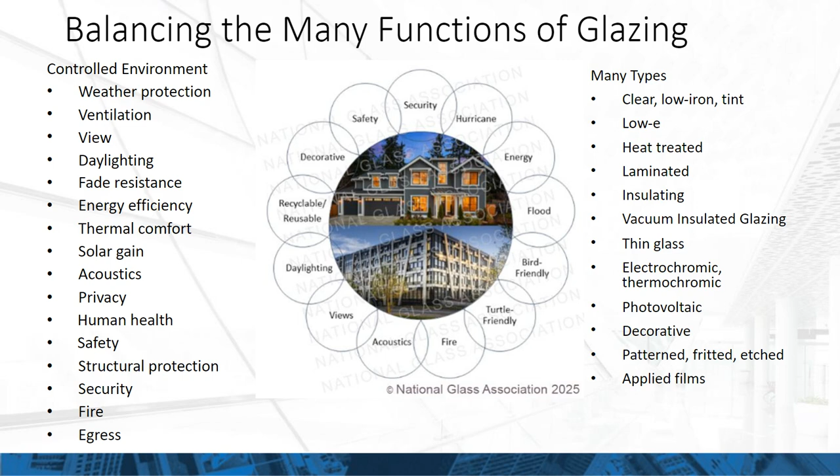For us at NGA, glass is not just for residential and commercial, but glass is being asked to do so much more in our homes and buildings. It's the only building envelope material that is capable of doing so, and so much more. You can see all of the different levels of impacts and applications for glass.

So why are we here today? Within NGA, we believe that for school security, windows and doors respond first. This chart that you're seeing goes from the 1970s all the way up to the 2020s. And as of yesterday, we've had even more. For 2025, there were at least 100 incidents of gunfire on school grounds, resulting in 32 deaths and 98 injuries nationally. So what can we do about this?

Back in Sandy Hook in 2012, similar to Hurricane Andrew in 1992, which was a catalyst for windborne debris codes and hurricane testing, Sandy Hook motivated members in the glass and glazing industry community to act. Companies began looking at school security and security glazing products available and realized that there was nothing designed specifically for schools. Most were intended for banks or embassies. So as such, within the organization, new products were born, as well as new standards.

And since 2014, the National Glass Association released information and bulletins on school security, security glazing for schools. What we have all seen since the Sandy Hook shooting in 2012 is that time is critical. The average length of an active shooter event is 8 minutes. The shortest has been 90 seconds. And the response time for first responders is on average about 3 minutes. Some active shooter events are over before the first responders arrive. And what we would like to say is that your glass and glazing can respond first. It can buy that time.

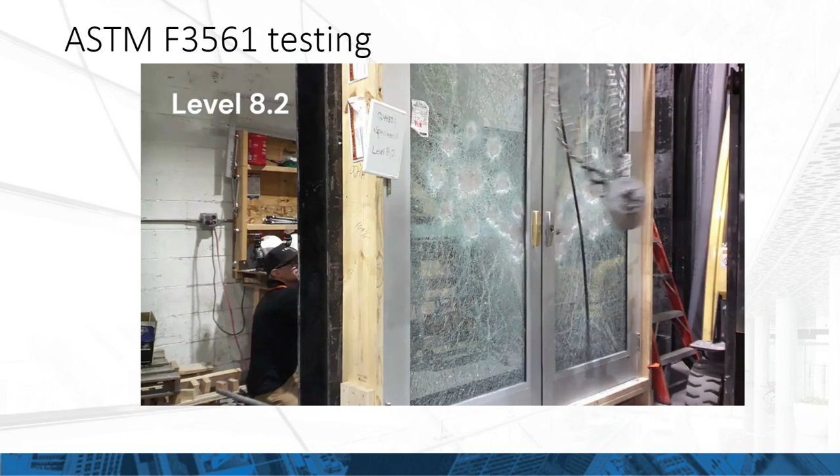And so it is not ballistic resistant. The bullets can go through this according to this standard. However, it does not leave an opening at all. As you can see, the impactor is there after the ballistic portion. And the door should not be open. There should not be an opening where someone can then enter the school.

Window and door solutions. Right now, we would like to say that security glazing resistant to forced entry can be used to slow down an attacker, allowing time for schools to enact emergency plans and for first responders to arrive. It allows school personnel and first responders to see the impending danger. So that's why you have the windows there, so they can see what's happening, alert, and adjust what they need to do to get their emergency plans going.

It also provides privacy and allows diffuse light. Of course, many of you as architects know you want the light in schools, so that the students can have better test grades, show up in school, and be aware of what's going on. And it also selectively blocks attackers' line of sight when translucent or reflective glass is used.

It can be designed for forced entry resistance and/or bullet resistance, and there are options for retrofit as well. We like to create a secure environment for teachers and students without imposing visible barriers, and of course provide passive protection even during power outages.

I'm going to turn this over now to Jamie Gascon, who will tell us a little bit more about Miami-Dade County's approach. Jamie? Thank you, Irmela.

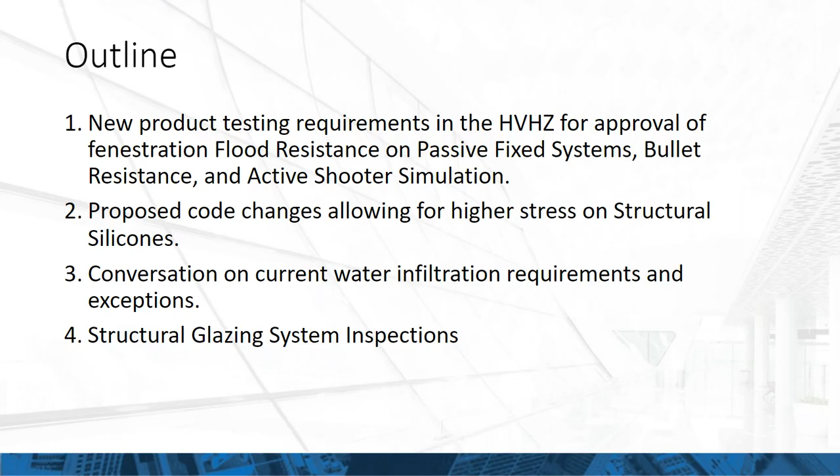Another change that we've made is for checklists on testing for bullet resistance and active shooter simulations. Added to which we then have a specific testing code change for increasing structural silicone capacities, and then as well a code change for the water infiltration on fenestration door systems. And then I'll end the segment with some structural glazing inspection requirements that are unique to our area here in South Florida under the high velocity hurricane zone.

So first off, the testing protocol that's been developed recently. This would be for flood resistance test procedures of passive in-place systems. And this has primarily been developed at the request of industry in collaboration with local testing laboratories for a set of guidelines on how to go about mocking up, selecting, and testing the assemblies that are going to serve as these flood resistant barriers and conditions.

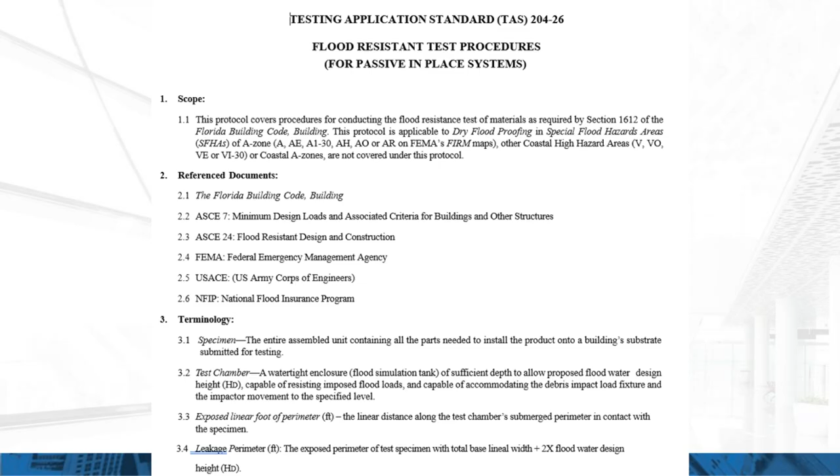The uniqueness of these fixed fenestration units is such that under the FEMA flood protections, there are some dry flood proofing conditions that are allowed by the code. And in lieu of providing alternative after-the-fact barriers, glazing has been more predominantly used in these dry glazed situations. So for that, the Florida Building Code does have a volume of testing protocols that are used in the high velocity hurricane zone, and this was the development of one of those for inclusion.

On the testing requirements, also for bullet resistance glazing systems, we here in Miami-Dade County have developed this new checklist that's going to serve for calling out 2 additional new tests for us here in South Florida, which would be the ASTM F3279 on the standard test methods for ballistic resistance, and the UL 752 test for ballistic resistance. Manufacturers will now have the options to include these as added performance on their product approvals with Miami-Dade County. This does have the requirement that each product type shall meet the requirements per the applicable checklists, if it's a door, if it's a window, and so forth.

Additionally, we also elaborated a forced entry resistance checklist to capture the performance under simulated active shooters, and that's then inclusive of the ASTM F3561 for standard test methods for forced entry resistance, similar to the video that Irmela showed earlier. And then this too would be as a complement to the type of doors and systems, glazing systems that manufacturers are seeking to qualify.

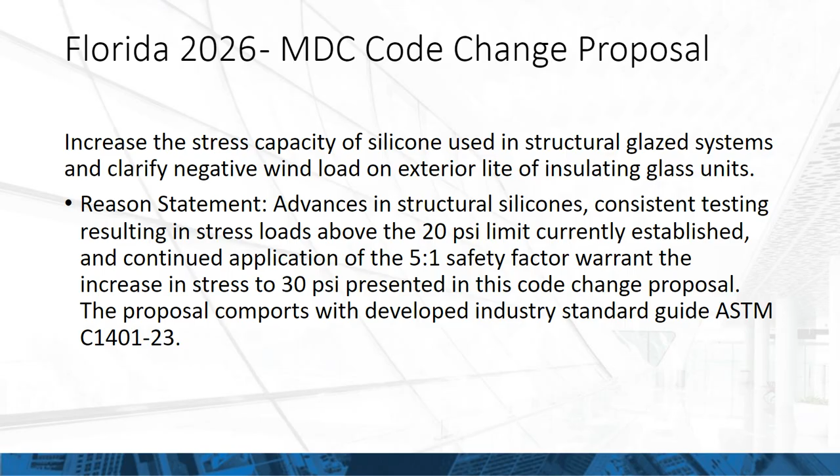From the Florida Building Code's perspective, the added change that was filed in this cycle was to increase the current limitation of the 20 psi stress limits on silicone. Presently, and I want to say that this dates back to the 1988 South Florida Building Code era, this limitation has existed there with the applicable safety factor of 5 to 1. Industry has approached us and consistently shown test evidence that capacities with current silicones far exceed that 20 psi limitation that we had in the code.

So there's been a code change filed to increase that from 20 to 30 psi while maintaining the safety factor of 5 to 1. There's also some minor tweaks here on the thickness and the qualified stress that needed further adjustment due to that, and this code change clarifies that.

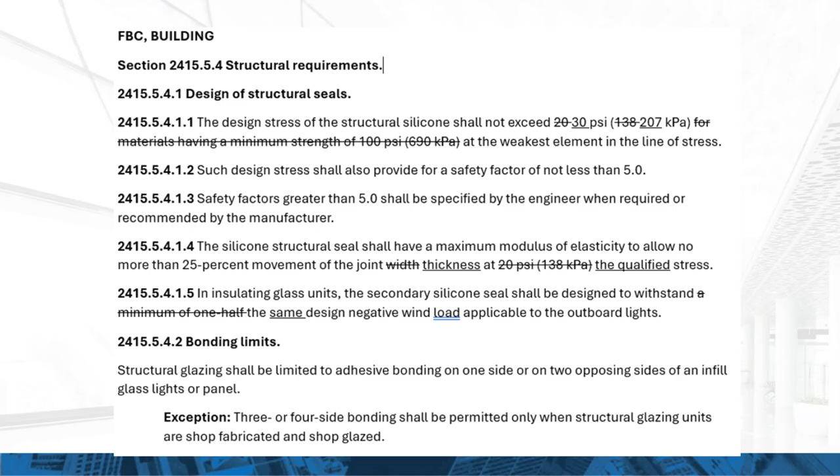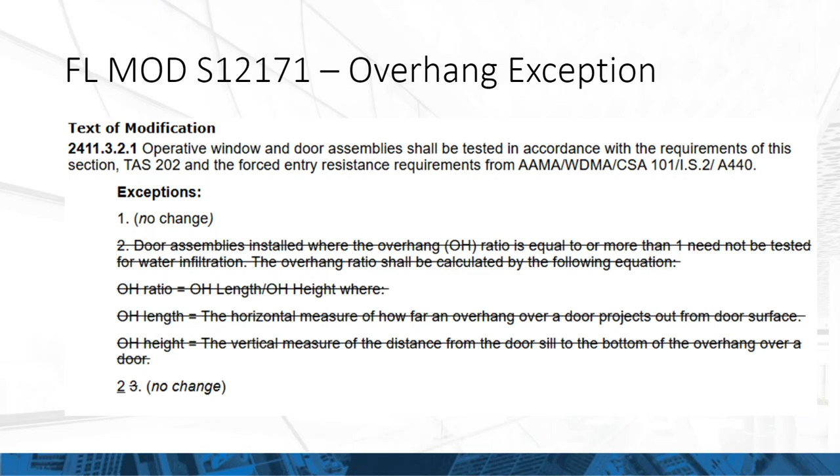On the overhang and water testing of doors, this is a proposed code change that we're dealing with in concert with industry. And essentially the first round was to eliminate the exception that currently exists in the high velocity hurricane zone, that if provided with an overhang, these doors would not need to meet the water performance. In the second phase of the code development, because that code change was disapproved, alternate language was proposed during the allowed period.

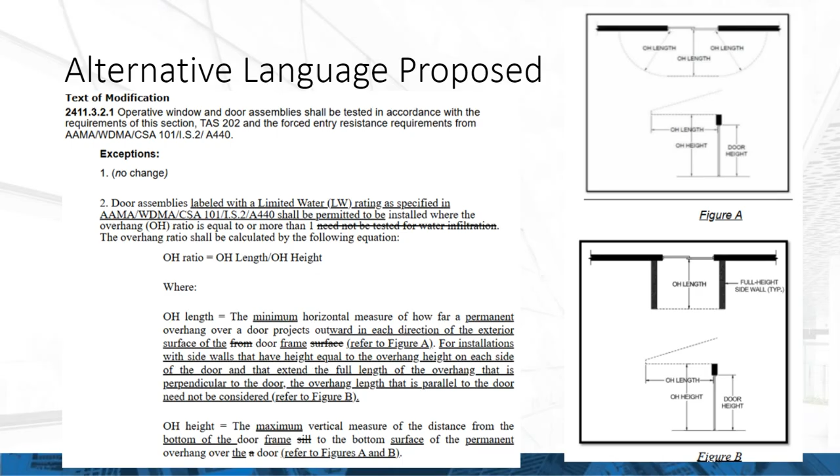And when you have some kind of alcove tunnel condition, that's also part of the considerations as shown there in figure B. This again is currently at the Florida Building Commission, going through the process for approval, potentially for the 9th edition of the Florida Building Code.

And then lastly, I wanted to touch upon Miami-Dade County's requirement for recertification of structural glazing. This is something that again existed in our building codes for a number of years prior to the Florida Building Code taking effect back in 2002, but which has not had the level of enforcement that the code requires.

So in 2022, our Board of Rules and Appeals discussed the matter further, developed a test criteria for effecting these types of tests, and we issued and circulated this advisory memo to all building officials to survey their respective territories and identify buildings that have the structural silicone and applicable to threshold buildings. And from that, a series of guidelines were developed for both the laboratories and the building officials to follow in documenting the performance of those units.

I also want to just point out that our website has been revamped. We do have now siloed the 4 sections of our Board and Code Administration section, where product approval, being one of the more highlighted aspects of our website when it comes to glazing and building envelope products, can continue to be searched by either product approval numbers or manufacturers, even categories of products, to verify their continued acceptance and limits of use.

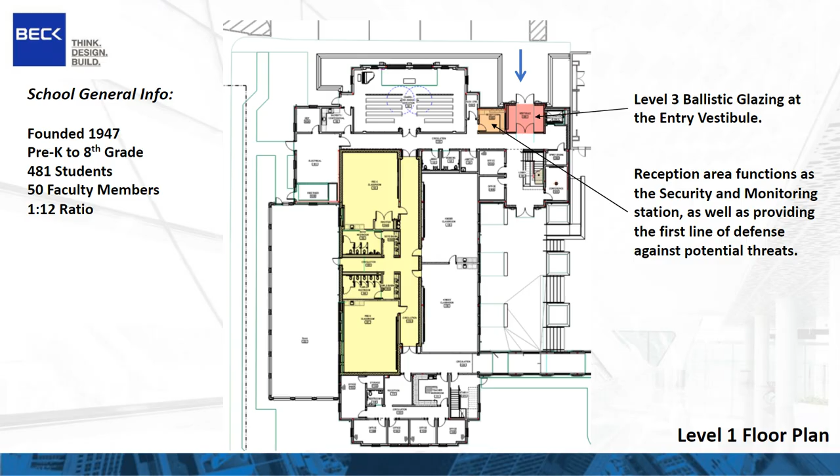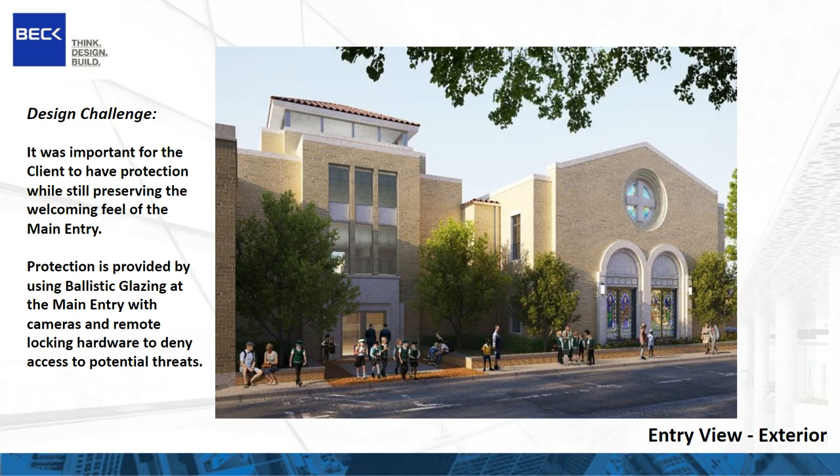And we're using level 3 ballistic glazing in that vestibule. And the reception area is acting more like the security monitoring station and provides the first line of defense against potential threats. So the big design challenge for the client was that it was very important to have the protection while still preserving the welcoming feel of the main entry. Again, they very clearly said they don't want this to look like a bunker. They wanted this to be inviting. The protection is provided by using the ballistic glazing at the main entry with cameras and remote locking hardware to deny access to any potential threats. And we find this to be a good strategy, and ballistic glazing and products like that help us to do this.

On the inside, it was very important to the client. They want to have the security, but they also wanted to feel openness. They didn't want the students to feel like they were coming into the airport security zone or to some high-level security area. And in this case, the vestibule was designed to be basically a man trap because all of the glazing in there is ballistic rated systems, and it's controlled by the reception area, which is the security station. But using these ballistic systems, we're allowed to have the light come through, the views come through, and it feels more transparent and open. And the client was very happy with this solution.

And as I said, this is all part of a process. We're in construction right now. They've got foundations down, and they should be getting steel up pretty soon. But as we moved further through the approval process, the client had second thoughts about the ballistic glazing that we're using at the window that sits between the vestibule and the reception area.

They thought the window looked too visually unwelcoming. It was too heavy, maybe too bank-like. So right now the design team is studying alternative window systems, investigating non-fixed options that would still provide the ballistic protection. This is definitely a process that's ongoing.

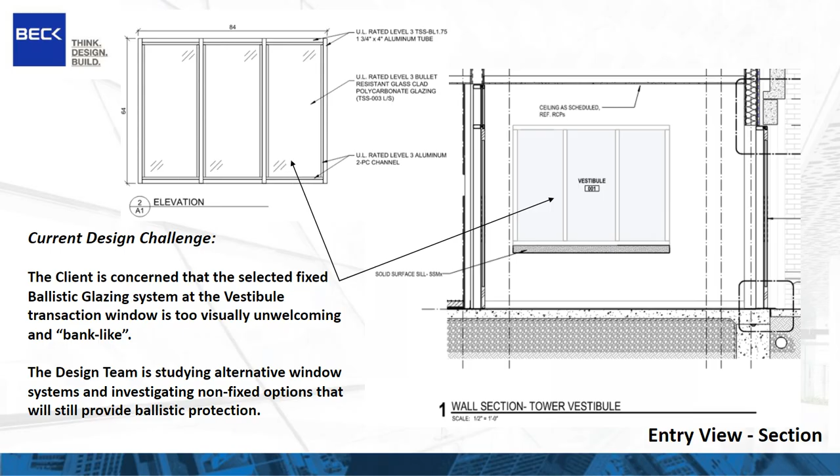The other part of this protection of the students is the storm shelter. North Texas has a lot of high winds and tornadoes and storms like that. And we're required to have protection for education in terms of the storm shelter. A lot of times the storm shelter is either a gym space or a cafeteria space. In this case, the extension, we didn't have any of those large spaces. And the client particularly wanted to incorporate classrooms and the bathrooms that were there and a hallway as part of it.

And again, the other issue was that this building is an addition to an existing church and other education structures, and they wanted to fit in with the window spacing, the aesthetics of the outside. And so we worked with that, and we also had our budgetary constraints to deal with, because originally we had designed all impact rated glazing at the windows to the building.

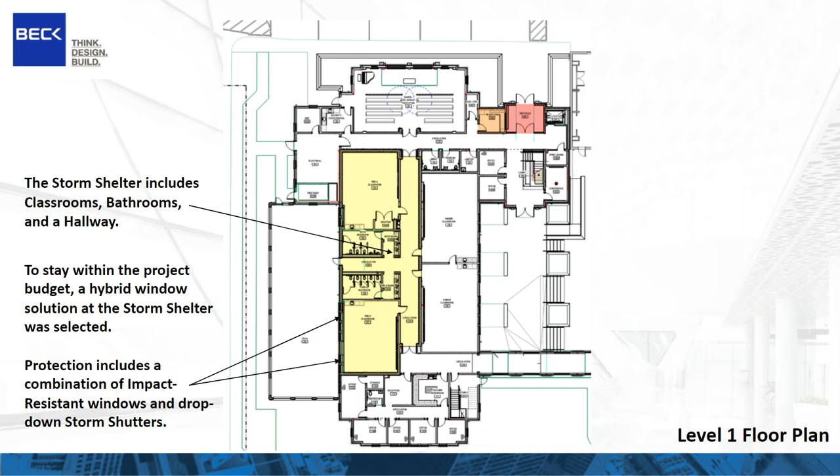Because of the cost, we looked at alternative storm shutters at the windows, which worked pretty well, except in a few areas where because of the wall for the storm shelter, you could not fit in the actual side rails necessary for the shutters. So we actually used a hybrid combination of the shutters and the resistant glass to provide the protection for the shelter.

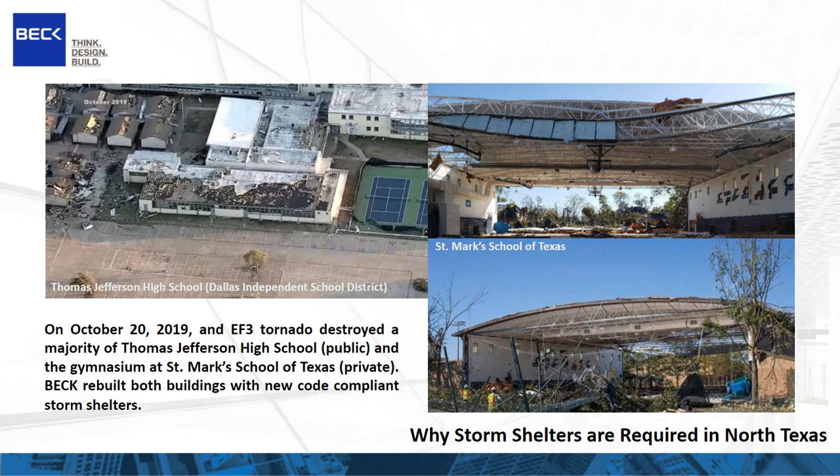And again, the reason we need the shelter in North Texas is because of the storms and the winds that come through. On October 20th, 2019, an EF3 tornado destroyed a majority of Thomas Jefferson High School, a public high school in the Dallas Independent School District. And also the gymnasium and several other buildings were heavily damaged at St. Mark's School of Texas, a private boys' school in the same area. Beck actually rebuilt both of these buildings with new code compliant storm shelters. But you can see the heavy damage that was done to both of these facilities.

As we moved forward in the design process of this project, the client was very interested in trying to maximize the dollars and the spaces. And we talked about an idea of having the storm shelter not only provide shelter from inclement weather, tornadoes and straight line winds, but it could play a role in the defense and protection of the students from forced entry and active shooter situations. So again, the main entry is protected by the glazing and is the first line of defense to deny entry or to trap them if they make entry.

And then the storm shelter is actually part of the lockdown system too. The doors to the storm shelter will close in an active shooter event and lock, and again slow down any intruders. And the walls of the shelter itself, which are reinforced CMU, will help protect that area, in addition to the doors and the other barriers that are already in place. So this was kind of a hybrid combined solution that the owner was very happy with, and we worked through with them to make all these aspects work.

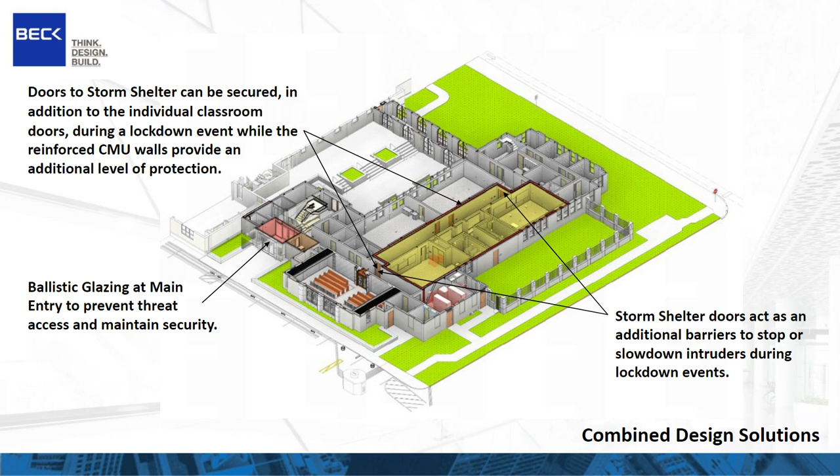That's kind of my case study. Ron Madley is going to take it from here. Ron? Great. Thank you, David. I appreciate that.

And great segue into what I want to talk about, which is integrating high-performance glass into safer school designs. But before we get there, I want to take just a moment to briefly consider the various test standards. You've heard a couple of them already, but I want to talk about a couple of the test standards for forced entry and ballistic resistance, which glass may be subject to.

The first one, and I think most everybody is familiar with this, is UL 752. It's one of the oldest standards out there. It is a ballistic test of a component or a system without any forced entry element to that test. Materials are subjected to live fire testing with specific ammunition for specific firearms, a certain number of shots at a required velocity and distance.

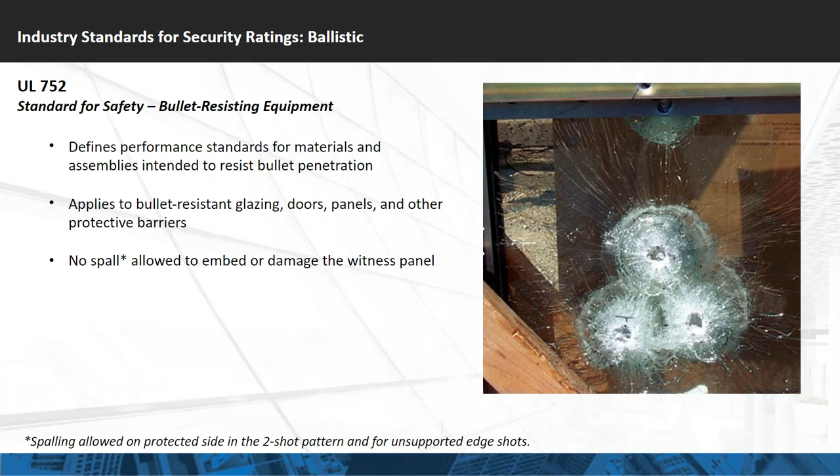The standard evaluates whether projectiles fully penetrate or if it allows any spall or back face fragments to get through. It's important to note that a product must pass all requirements of a given level of the standard to be certified at that specific level. In other words, the levels are not progressive or hierarchical. It was first issued in 1942, and the current 12th edition delivers some significantly enhanced clarity, realism, and rigor in the performance testing.

This page has a lot of text on here, and I'll summarize this by saying the two standards on the left, you see, were published in 2005 and 1998, respectively. ASTM E2395 has no ballistic component to the testing. It is purely a forced entry test, starting with a series of hand manipulation tests of the glazing. There's a lock manipulation followed by an impactor test and a missile impact test, as well as some force pulls that are done on the samples, then a final manipulation test again. Again, no ballistic weakening in that.

Similarly, ASTM F1915 has no ballistic component to the testing. It's purely a forced entry and a pretty aggressive forced entry test at that. It requires consistent duplication of testing using a standardized test fixture, using a large blunt and a sharp impactor over a number of impacts over a period of time. These are done at both artificially cold temperatures and artificially warm temperatures. And then there's a small torch and blunt impactor test that's done at ambient temperature to simulate a sustained flame attack. So a little different approach there.

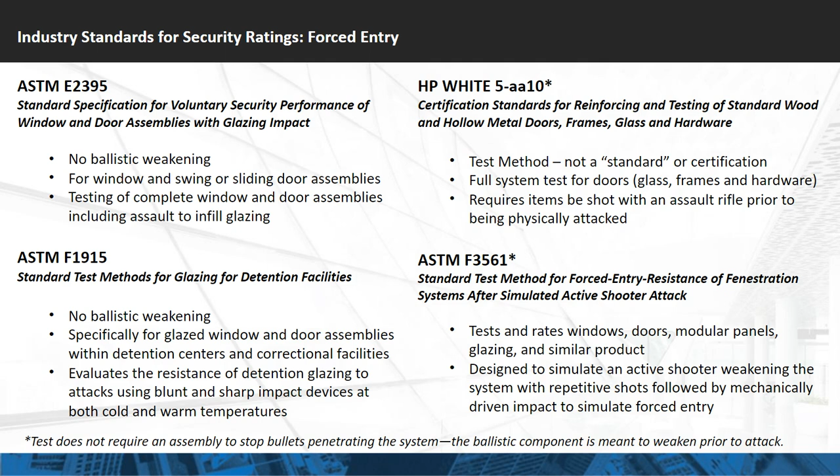The ones on the right are system tests, and we'll focus more on F3561. This is, as Armelin noted earlier, the most recent of these test standards. Published first in 2022, it's undergone a couple of revisions since then. It has a ballistic component. It's designed to use an AR-15 style weapon to ballistically weaken the elements of the system, including the hardware and the glazing, before a prescribed forced entry attack is commenced. It's a pretty rigorous test with 8 different levels of potential protection based on the energy that's put into that sample.

And then finally, ASTM F1233, published first in 1989. This is a very complex ballistic test with forced entry protocols. So it's ballistic and forced entry. It has 12 primary ballistic classes; various results, including fair and unfair shots, penetration or no penetration of the ballistic material through the test subject, and spall or no spall, are all noted. Forced entry is then commenced with a sequence of 41 different test elements, including a flame test, broken down into 5 major classes and subclasses.

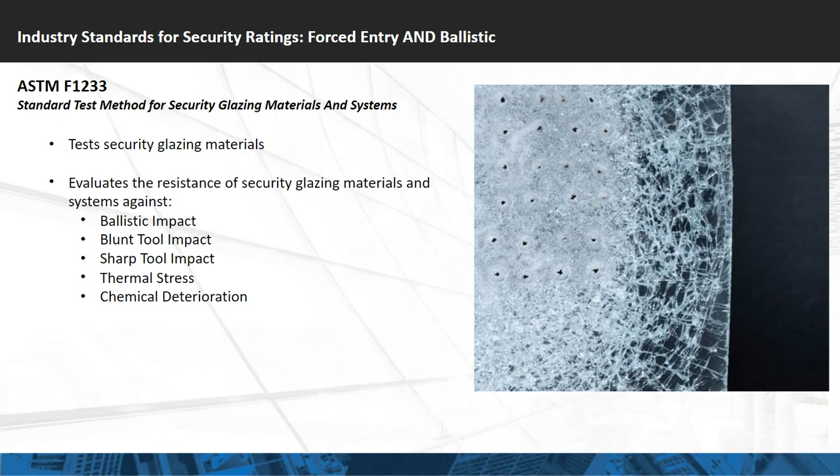The test standard provides some guidance to potential buyers for how you might classify the risk and the threat for both forced entry and the ballistic piece, broken down into 4 major categories: residential, commercial, industrial, and high-risk assets. Notice that there's nothing mentioned about schools in that particular standard. And when we think about schools, we think about places where enhanced security requirements overlap building code requirements. And as Irma touched on before, glazing is often asked to do a lot of things in a building.

And for us, our primary concern here at TGP is about fire. There are 3,200 plus fires annually in educational buildings specifically, and that ties into the second most frequent target site in active shooter incidents. So there's this real intersection of potentially having a threat, whether it's fire or an attack, that could join up in a single system, and you have to provide protection for that.

So depending on the assembly, its context, and stipulations in the building code, it may be required to meet any or all of a number of fire-rated standards first, including UL 9, UL 10B or C, UL 263, UL 1784, and NFPA fire codes, NFPA 80, 252, 257 as an example, or even ASTM E119. It's important to note that all the components, the hardware, the glass, and the frame, must meet the required minimums for specification here. Enhanced security components, like forced entry and BR, must not interfere with the accessibility and egress requirements of that fire-rated system. So if you think about barricade devices, these may not allow free egress or meet standards outlined in the Americans with Disabilities Act.

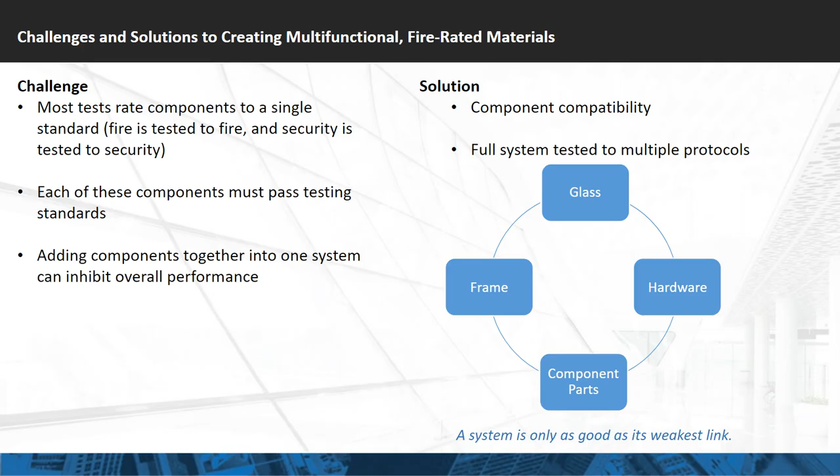to occupant safety. For example, many security-rated components are plastic-based, and they can burn quickly and at great intensity, potentially inhibiting the ability of a fire-rated component to protect occupants. The temperature rise requirements can be exceeded, and maximum temperature parameters of testing standards may not be met, resulting in improper performance of the system. Hardware meant to impede unauthorized ingress must also allow free egress when used as part of a means of egress system.

So looking at these multifunctional fire-rated glazing systems, when seeking solutions, a system approach ensures that solutions live up to its intended requirements. Multifunctional fire-rated systems combine compatible security and fire-rated components, which are tested as full systems to multiple standards. With each component within a single system jointly tested to both fire and security standards, specifiers, buyers, building owners, and occupants can all have confidence knowing that the product will operate according to all the required test protocols.

The security vestibule, similar to what David was speaking to earlier, was one of the several security measures included in the retrofit scope. The interior doors, side lights, and transparent wall panels allow front desk staff to visually assess visitors and to monitor the parking lot and the main corridor. Helping to meet the voluntary safer school design goals, the security ratings for these glazing assemblies provide a barrier against exterior threats, buying occupants time to alert authorities and to take appropriate action.

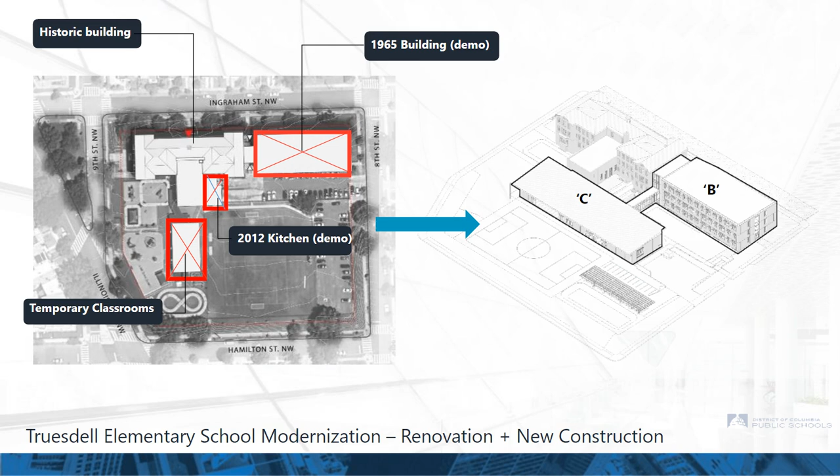A primary design goal of the project was to maximize internal connections and preserve open space on campuses for learning and play. The new academic building aligns with the historic building along the front main street, and the new community building is set back to allow for a protected interior courtyard that serves as an outdoor classroom as well as a playground for the youngest learners and the Child Development Center that will lease the basement floor of building B.

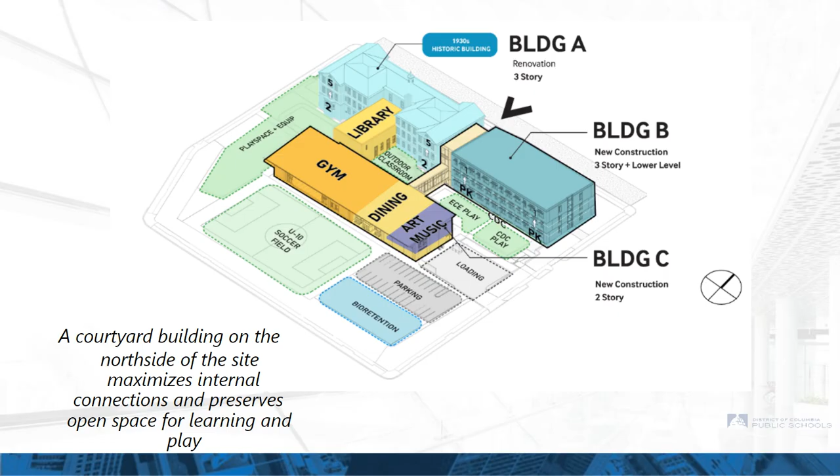These buildings are connected by a bridge that allows for an enhanced visual connectivity in this protected internal courtyard space. This campus also includes a larger play area on the west side, open to the community during the weekends, as well as a soccer field, parking, and a bioretention area that manages all the stormwater for the local DC requirements. So you can see that visual connectivity within secure boundaries is a key design element of this urban school campus.

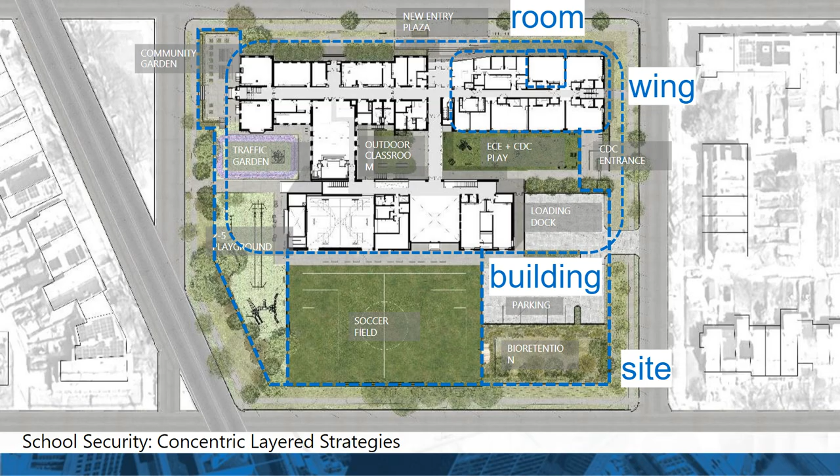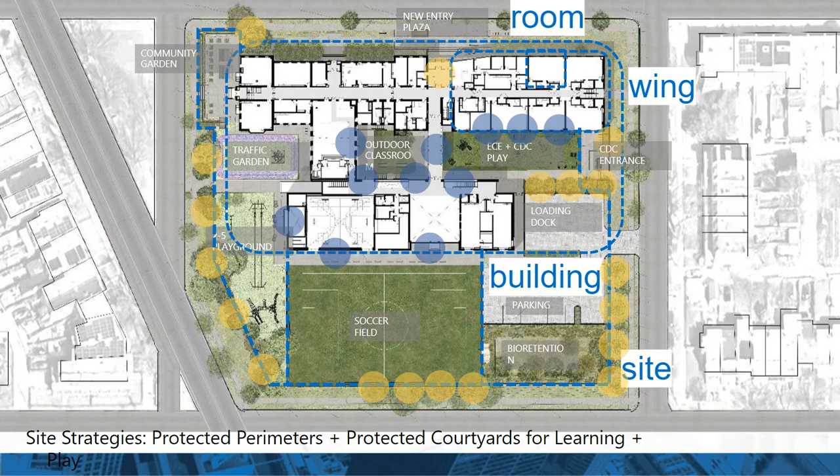When we plan for happy schools, we're thinking about physical security at the site scale, at the building scale, at the learning wing or neighborhood scale, and at the classroom scale. At the site scale, we are using both passive and active strategies to define boundaries like landscaping, sidewalks, and canopies, increasing visual surveillance through strategic glazing and night lighting for eyes on the street and external learning play areas, and protecting outdoor spaces using the building form, landscaping, and perimeter fences, as we can see happening here for the outdoor classroom and play areas in the center of the campus.

We work closely with school districts to understand their pickup drop-off routines and implement secure entries to the site. At Truesdale, the new main entrance has shifted to the connector space in between the academic buildings along the north-south axis of the building, allowing for a more gracious entrance plaza for families to gather in the morning. Along the west side of the property, the west entrance also serves as an arrival entry point, allowing students and families to gather on the playgrounds before the start of school.

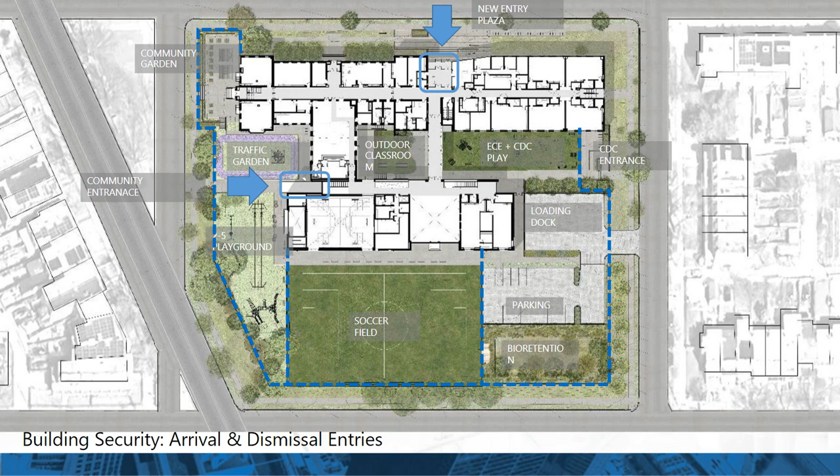This area will also be available to the community on weekends, as well as the community garden in the northwest corner and the soccer fields, but access to the rest of the campus is isolated with perimeter fencing, as you can see with the dashed lines. The front entrance has layers of security, which I'll talk about in more detail in a few minutes. And the west entrance also serves as that community entrance I just spoke about.

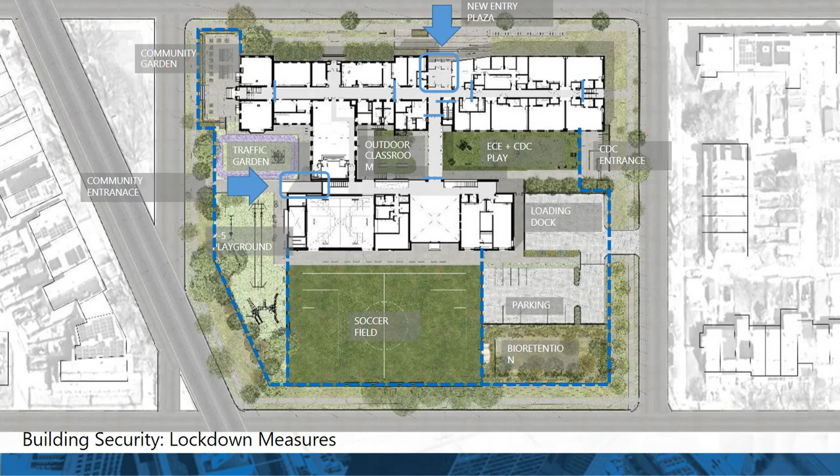The gym and the dining commons are used in that south building during after hours as well as the playground areas. During these times when the community is using the building during after hours, the rest of the academic buildings are isolated and inaccessible through lockdown, controlled entry at the doors at the bridge. So as you can see, on a given school day, we provide one secure way into the building, but many ways out for safety and egress.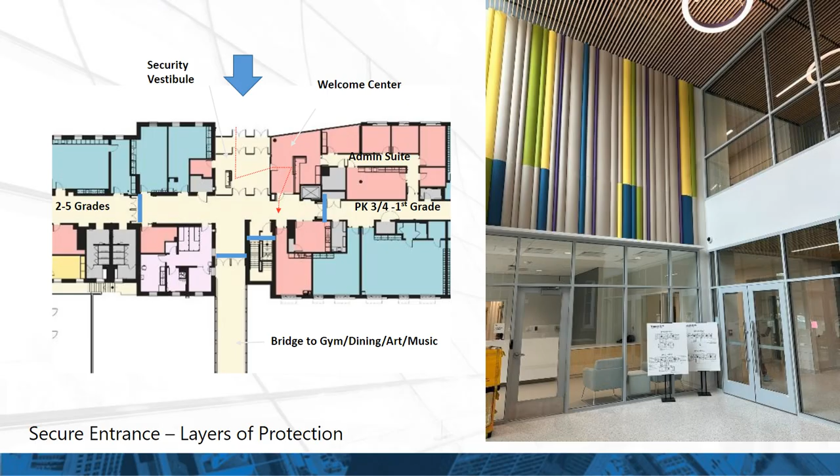And in the event of an emergency, the doors into the academic wings, the bridge, and the stairwells are all on the lockdown emergency plan, providing an additional layer of protection. In this space, there's a lot of visual connectivity, but physical barriers with the storefront glazing. That is all a laminate interior glazing.

At the classroom wing level, we cluster classrooms into communities while sprinkling in administrative rooms on the floors for added staff engagement and visual surveillance. Lockdowns occur at the corridor level with access to stairs controlled by the lockdown hardware as well.

At the classroom level, we design classrooms to maximize daylight and visual connection to the outdoors, returning always to our ethos that high-performance buildings should inspire and delight. All classrooms have ample access to daylight and outdoor views, protected by drop-down interior shades.

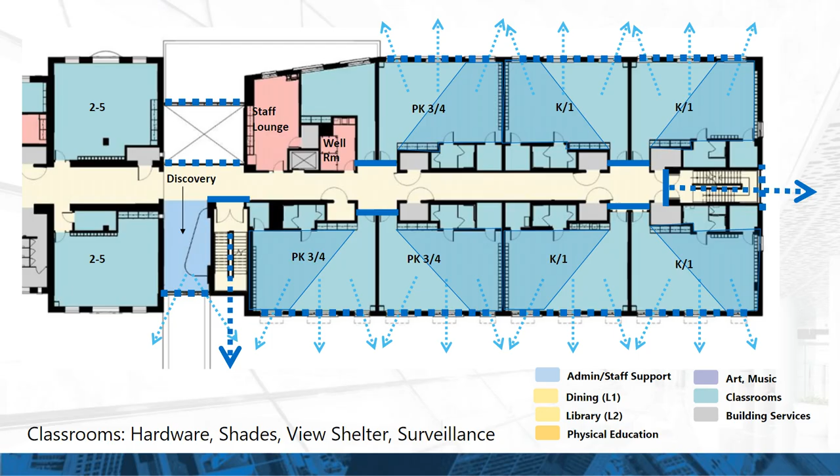In between academic corridors, we situate the flexible discovery zones for teachers to use as breakout spaces. These discovery zones fall in the glassy connector with direct connections to the outdoors, but from the upper levels, the second and third levels.

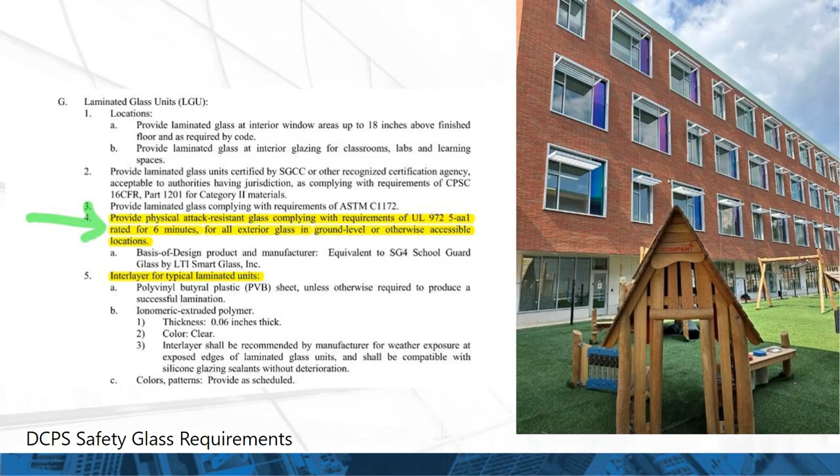In terms of safety glazing, our clients at DCPS require physical attack resistant glass at all ground level and accessible locations. You can see here in their EdSpec requirements, they require protection meeting UL 972 5-aa1 ratings for 6-minute resistance, equivalent to a School Guard 4 rating, or School Guard glass SG4 was their standard.

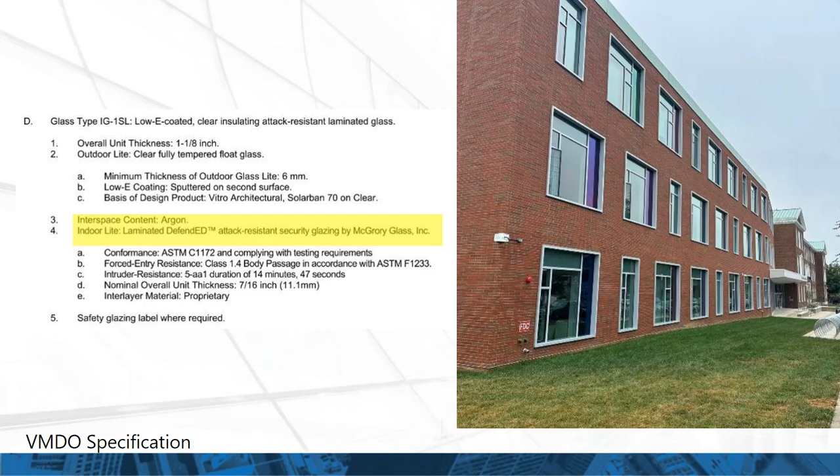What we provided them was the laminate DefendEd glass attack resistant security glazing by McGrory Glass on the 4th surface of our IGU unit, integrated into the IGU unit that is a Solarban 70 glass on the first surface.

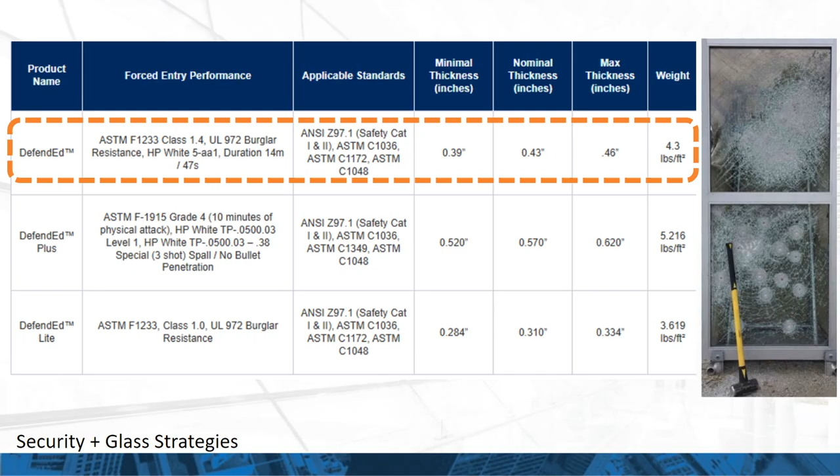Here is just a chart of the different DefendEd glass types, and we ended up going with the DefendEd, which was a little bit more robust than the 6 minutes resistance. I think the DefendEd has a 14-minute resistant rating.

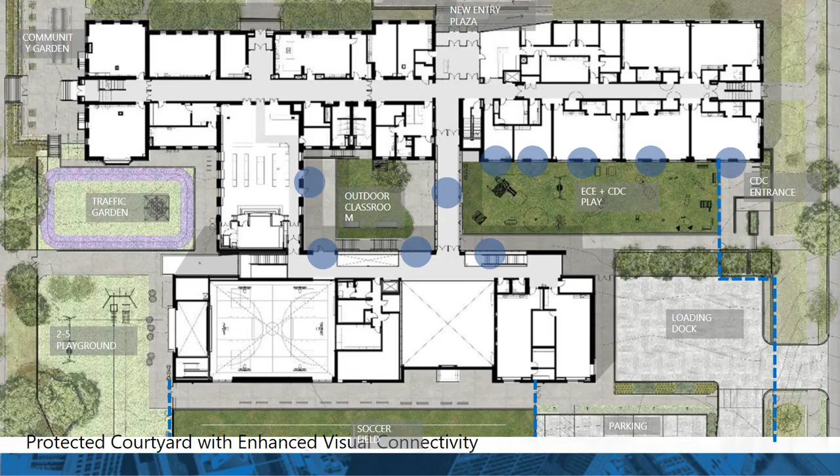Moving on to Alexandria City Public Schools, we are currently in final design phases for this school, which is also a modernization of an existing campus with a historic renovation component. Through design, we iterated on various campus massing approaches, and with the community's input, we landed on this open heart concept, which has a lot of similarities to the Truesdell Elementary School project. The scheme consists of 2 densely programmed bars flanking a central shared indoor-outdoor space.

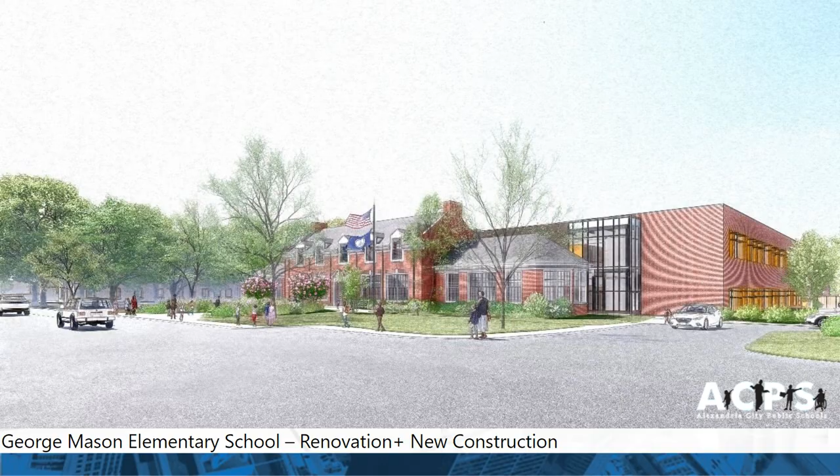A few key features, maybe moving along here. A few key features of this space is that we really wanted to connect that internal loop with the external loop of circulation and its solar orientation, maximizing views into classrooms.

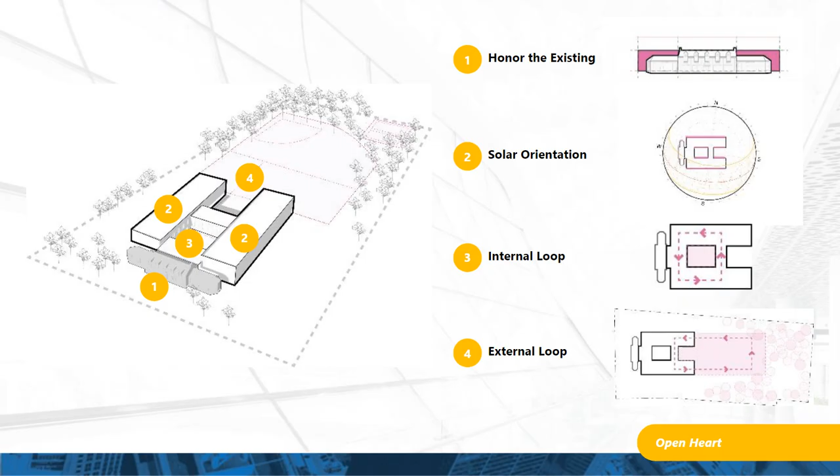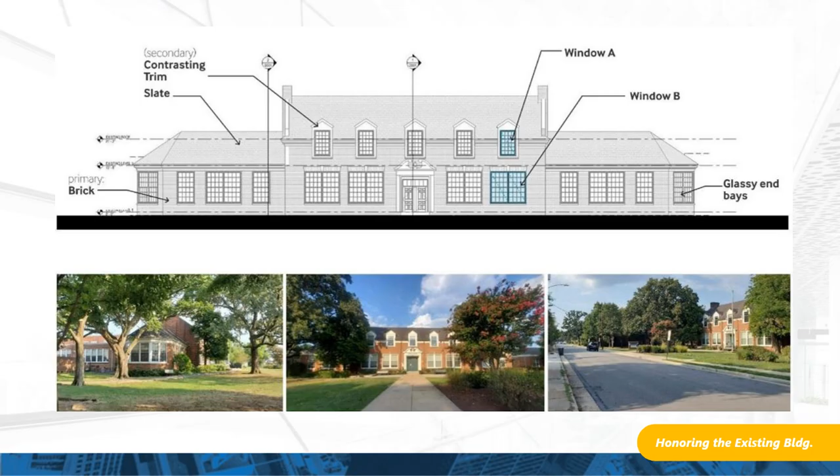This school also has a historic component. We are looking to maintain the historic front entrance of the building and replace all of the glazing with new fixed offset windows. And on the first floor, they will have security glazing. This is the aerial view of the open heart concept.

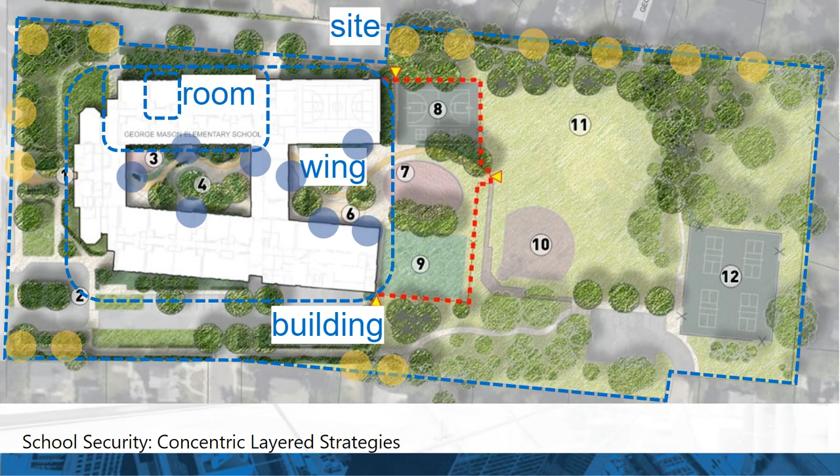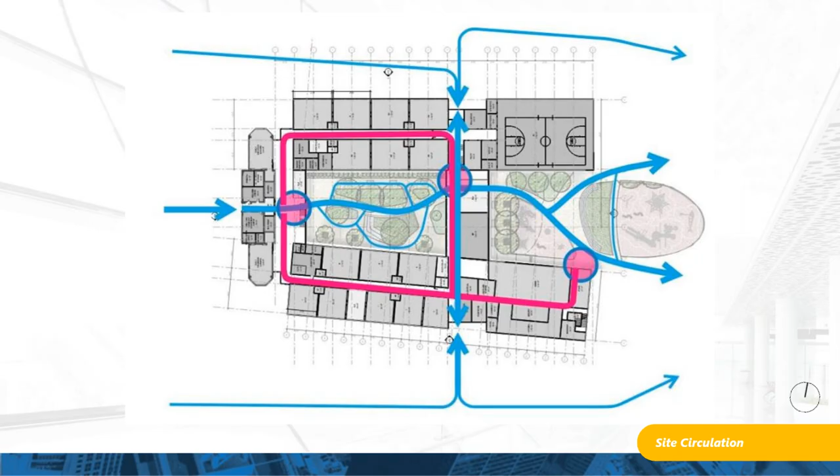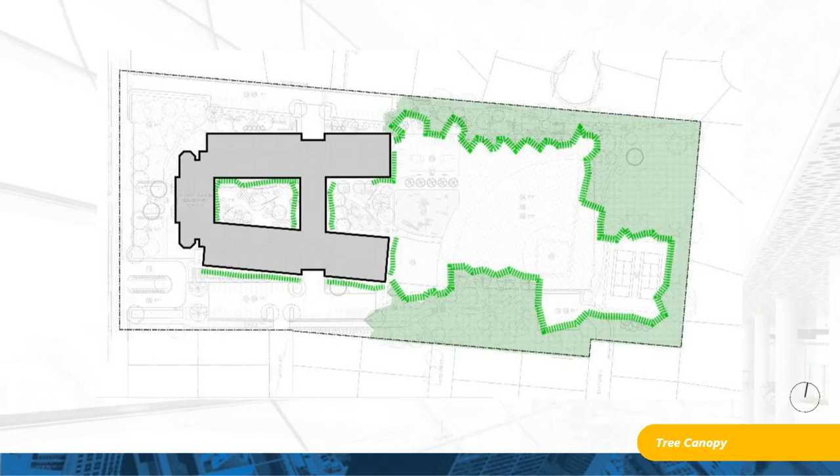And as you can see, we're using similar concepts to the Truesdell School, looking at layers of security from the site to the building, to the academic wing, to the classroom. Circulation through the building was a key component to our design with very clear entry points into the building and into the outdoor courtyard spaces. Another key design element is extending the tree canopy from the site, that existing canopy, and mimicking that in and around the building space.

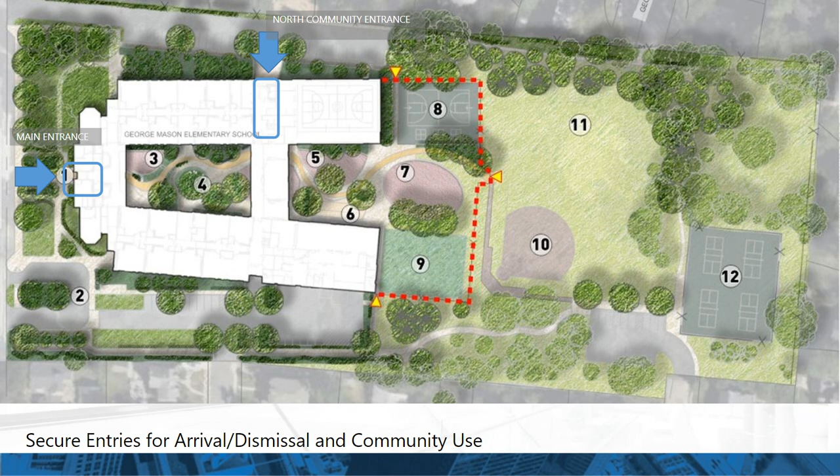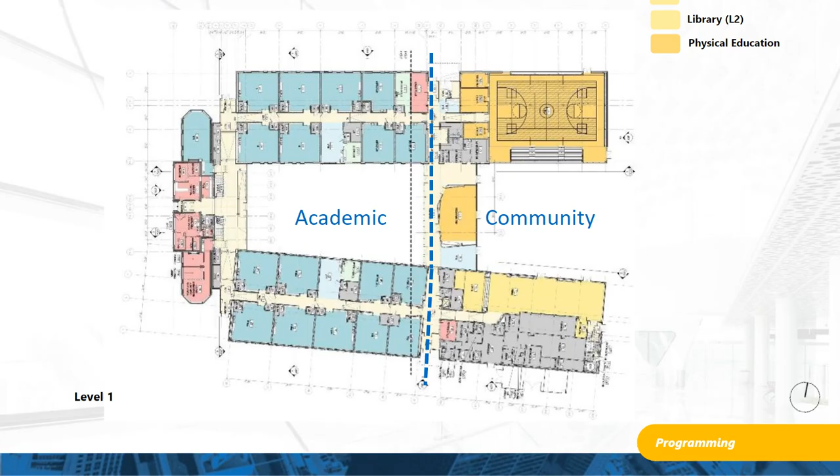Similar to Truesdell, secure entries for arrival and dismissal and for community use are critical to our design and layout of the building. And separating the community spaces from the academic spaces so that they can be used during off hours and isolated from the academic bars.

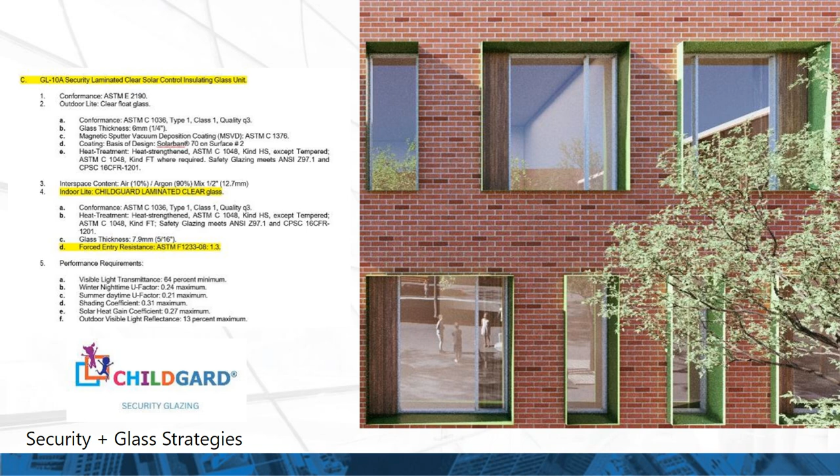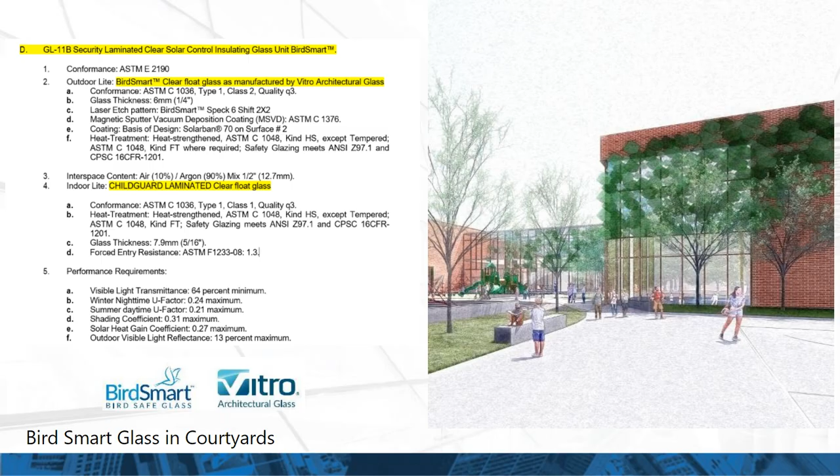In this project, the owner required a ChildGuard glass on all exterior, I think it's first and second level glazing, and we have specified the ChildGuard glass with forced entry resistance. In addition to that, we are looking into using Bird Smart Glass for a lot of the glassy connectors in the corridor or in the interior courtyard to protect the birds. It's also becoming a new code requirement in our area.

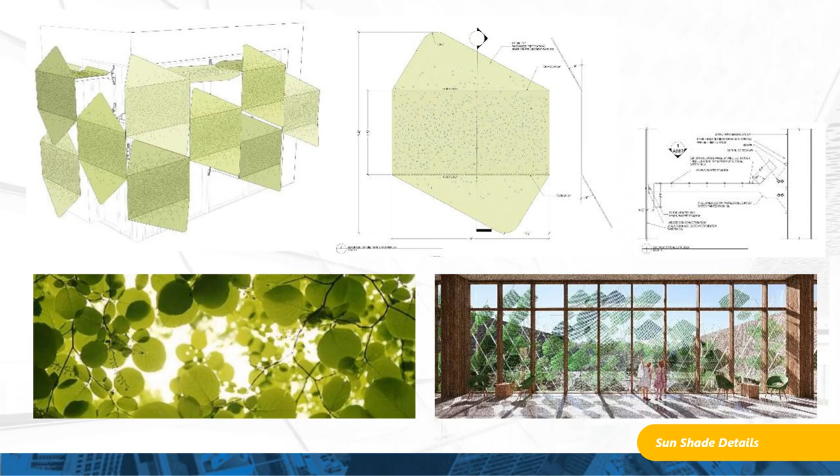And finally, interior views out are very important, and we are protecting our glassy connectors with an integrated solar screen that is meant to mimic the dappled light of sun entering through trees. This is just a final visual of the interior courtyards, and of the building from the play areas. Thank you very much.

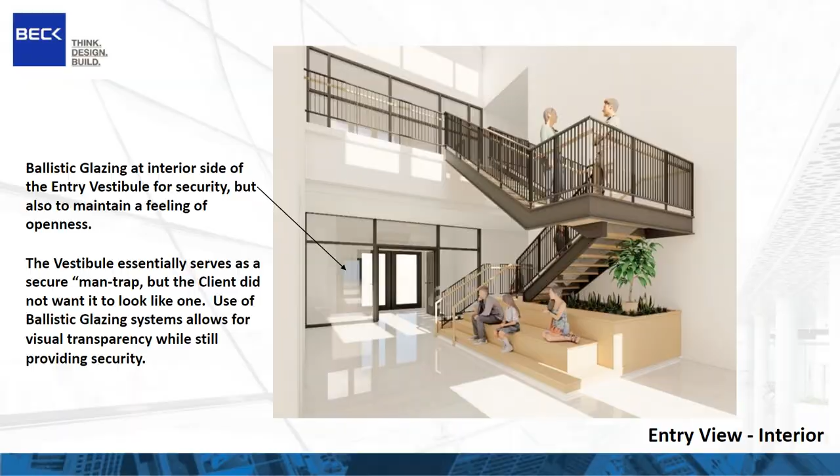Okay. All right, and then something that came up, I think, Ron, in your presentation, but that also seems to be a potential challenge going forward for everyone who's listening in, is this idea of multifunction security and the increasing levels that we may start needing, at least on the ground level. So you want to prevent entry, but apparently that doesn't necessarily always work if you're shooting from the outside on levels that we would have never even conceived of as necessary before.

But in terms of the multifunction, if you have a storm-resistant, in Florida, let's say, glazing system, to what extent is it also ballistically resistant? Does it provide any kind of slowdown? Or do you really need to rethink a complete new idea of a multifunction glazing system that could satisfy many different criteria at the same time? Yeah, that's a good question, and a really good question.

And I think it comes down to, well, it depends on the specific product and products that are used in combination. So a lot of times a particular product that might, say, be fire resistive, some of these products can be inherently ballistic resistant to certain levels, either with no transformation or with minimal transformation. They can meet certain levels, 1, 2, or 3, et cetera, of, say, UL 752. The same is true with these windstorm-rated products. There are multiple outcomes that can happen from a single product or a combination of products.

And just because it's been tested for one particular scenario or one particular standard doesn't mean it will or will not have some efficacy to another standard. And it's important to know that you have to test those systems as complete systems to really know that. So because of the number of permutations and combinations that exist, it's a daunting task for anybody. It's really understanding.